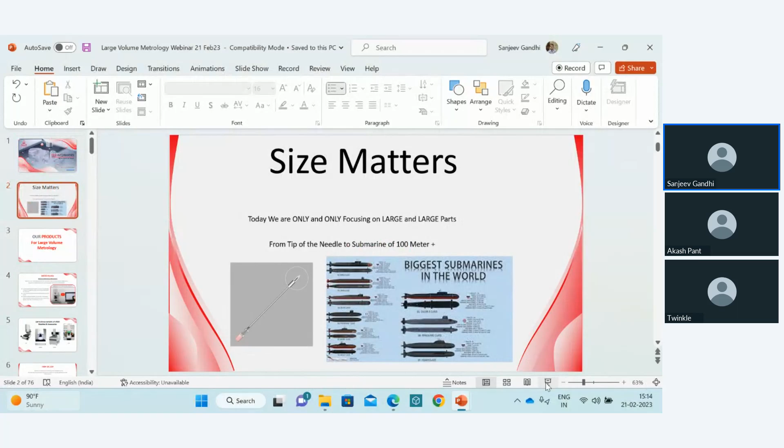With this little introduction, what Akash started: size matters. Well, size matters for you because you are manufacturing. Size does not matter for us, because if someone from the medical industry comes to us with a needle, for example Hindustan Syringes, we are able to measure that needle, even the tip of the needle. On the other hand, when we talk to Hindustan Shipyard or Goa Shipyard or L&T, who are making large submarines, we are working with them. So size matters, but for us, size does not matter.

End of the day, whether it's a needle or a submarine, it is a physical object having a drawing or a CAD, and we should be able to measure that using the drawing or CAD very precisely. That is what our job is.

As I said, webinars are basically for knowledge sharing, trying to understand each other. Today we took a topic which people generally avoid, because most organizations cannot measure very large parts. But since we are able to measure from the tip of a needle to a large 100-meter-plus part, our topic today is only on large volume metrology. For the people attending today, if some of you are from small parts, please don't mind, stay available, we can answer your questions as well. As I said, a part is a part, but my focus today is going to be on large parts only.

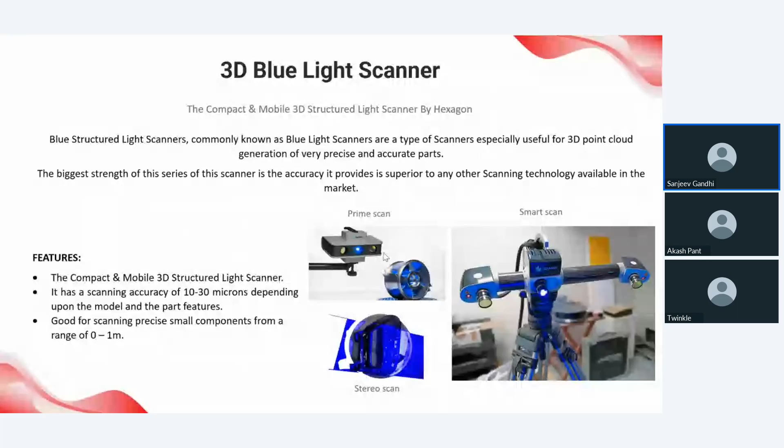All these technologies are from Hexagon, my partner. Hexagon is a multi-country equipment maker - this equipment is made in Germany, and on the other hand, some equipment is made in the US, etc. Another company, Wenzel or ZG now, we are talking about handheld scanning, which is very common.

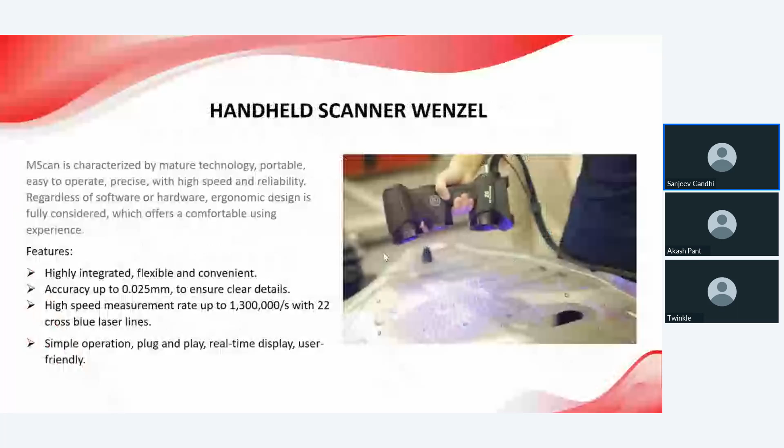Now jumping to another technology without touching the application yet - application I'll come back to. LMI is a company from Canada doing a lot of automation-related work, measuring parts with the help of laser sensors. It can be a point sensor, a line sensor, or a snapshot sensor. Just give me a couple of minutes, I'll talk about the application.

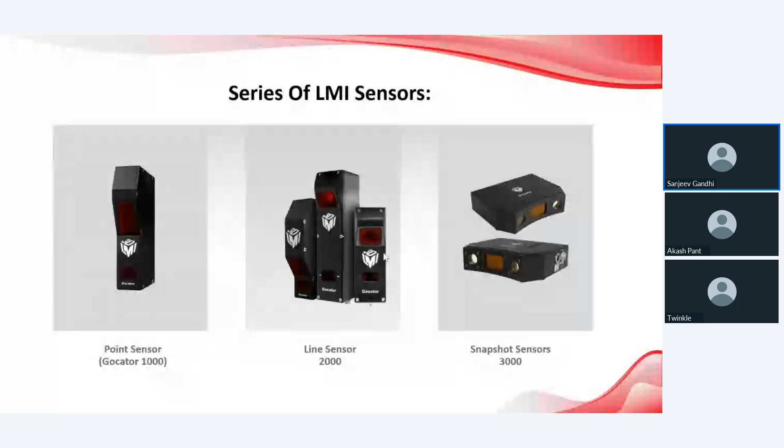Tracker, very, very important for large parts. As I said, today's theme is large parts. So laser tracker by Leica, or Hexagon now - Hexagon took over Leica. Since I worked directly with Leica for 17, 18 years, that's the reason I belong to your line precisely. So I'll be talking more about a lot of applications - of course Romer arm, or Hexagon arm, are some of the applications.

One very niche product we call gap and flush, from a very niche company from UK called Gap, the Third Dimension. It's very popular for measuring scratches on a large part, and very popular for measuring very small bend radius on a very large part. So this is a small tool, but can be used for very large parts.

You all remember, CMMs are generally meant for shop floor. But shop floor CMMs are also designed nowadays to measure large parts. When your shaft is 10 meters and still you want to maintain GD&T with the accuracy of 10 microns, is it possible? Very, very difficult. But some organizations like Itaka, an Italian company, have proven that even large parts on a shop floor can be measured with high precision. So these are some glimpses of that company.

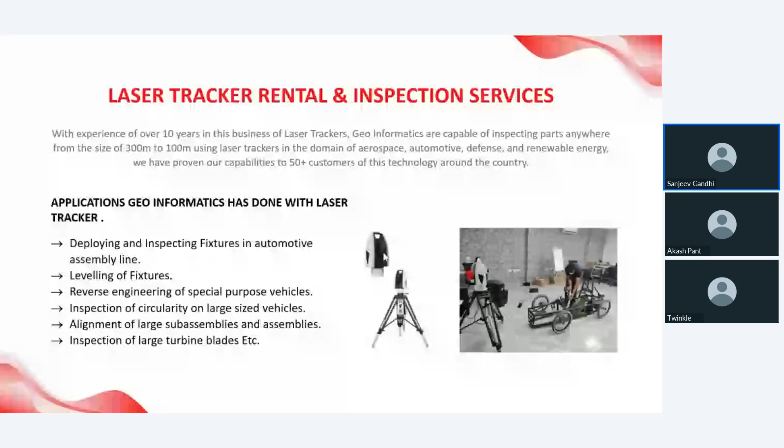Both are surely possible. Well, I will stop here about just talking about technology and technology.

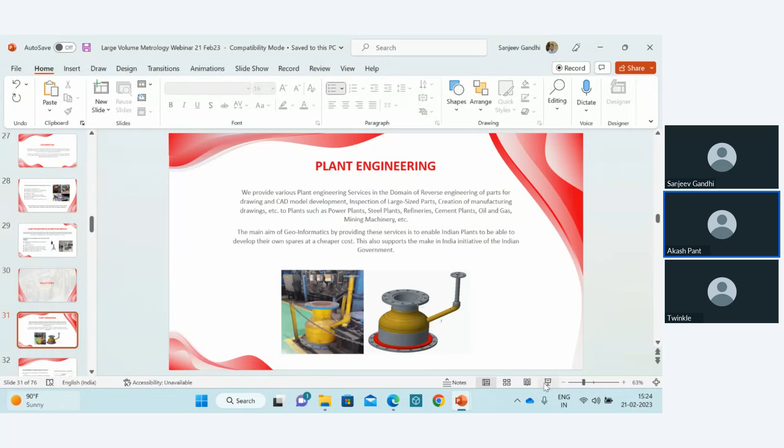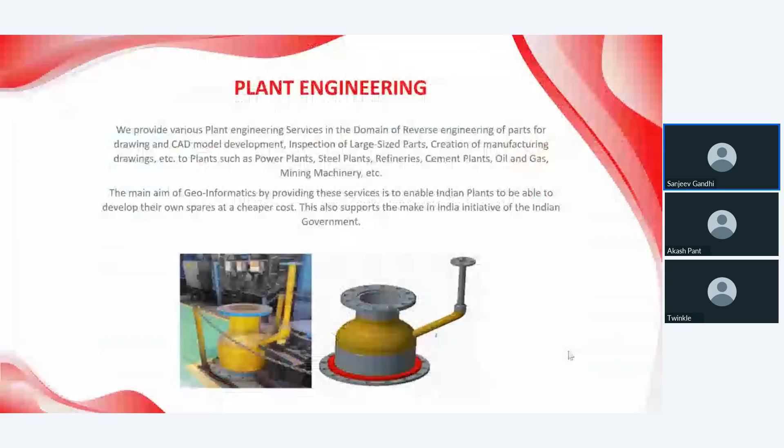When we say plant, now I'm talking about the application, not just the machines or hardware or software. When we say plant, what does it mean? It can be a cement plant, an oil refinery, NTPC's power plant, BHEL's turbine plant, any plant, a sugar plant. Let us take a sugar plant.

Such kind of plants have a lot of assets, and these assets were made in China, unfortunately, or Russia, or some other countries. And those countries never gave us technology to maintain that. So generally these plants do not have drawings, do not have CAD. Due to that, they are not able to maintain them after 20 or 30 years. So most plants have opened their own departments, which some organizations call an engineering department, maintenance department, automation department, etc. So what they do is try to make drawings of these parts.

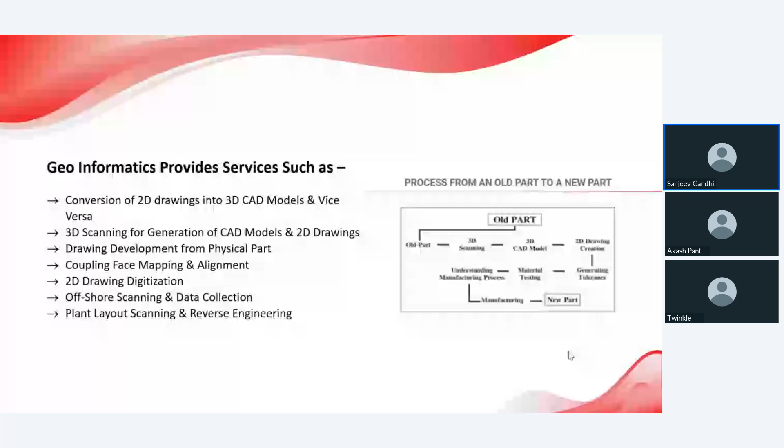So solutions in aerospace industry, what we can provide - again, as I said, size. If you see here, size doesn't matter to us. Be it a wing or a fuselage or an engine part, all are different sizes, bigger size, small size.

Our organization is capable of giving you solutions irrespective of the size.

So what we do for Make in India: we do drawings, 3D inspection, and reverse engineering. Reverse engineering is not a bad name at all. It simply means I need a drawing but I don't have one, so I create it from the part. In normal engineering, first there's a drawing and then you create a part. But today, you have a part and you are creating a drawing from the part.

Surface modeling, irrespective of class A or class B, inspection of large frames, etc., we are able to measure. As I said, my partner Hexagon—we work with them, they've been our partner for many years now. So we work with the laser tracker.

I'm going to spend some time on the laser tracker and show you some astonishing pictures. You may be wondering whether we had done such kind of work or not—we had done serious work in our country. I can't name everyone, but I can name some of them. You know very well, when you talk about defense, shipbuilding, or submarine building, you sign NDAs, but still certain things are allowed to be discussed.

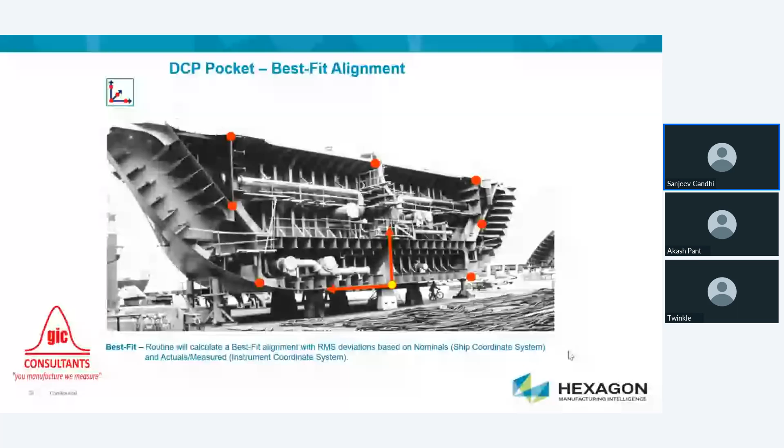So we have technology now for handling such large structures. You can imagine how big the size is. This is our strength—we are able to capture such large parts without touching, non-contact. Of course, I shouldn't say only non-contact; in many places we have to make contact as well.

These are the decks where a lot of strengthening elements are there. We need to go and measure that. This is what we do with the help of our technology.

When you talk about a shell, be it for a refinery or a submarine, that is not rolled in one go—it's rolled as a couple of segments, then you weld those segments together. After welding, does it still remain a perfect cylinder? Practically no. But how much is it out of cylindricity or out of circularity? You need to know, because you need to correct that before you start using it. This is our strength.

We are able to capture shells as big as 8, 10, or 12 meters, sitting horizontally or vertically. We capture that with the help of the laser tracker, thanks to Leica and thanks to Hexagon, and we're able to measure very, very precisely.

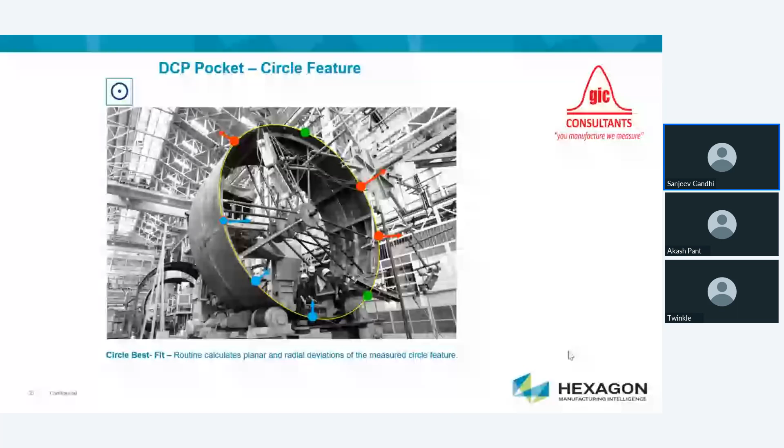All these things you are seeing are large parts—this is a hull for a large ship. And you see, the hull also has a profile; it's no longer just a geometrical part. We are able to capture all such kinds of things very easily.

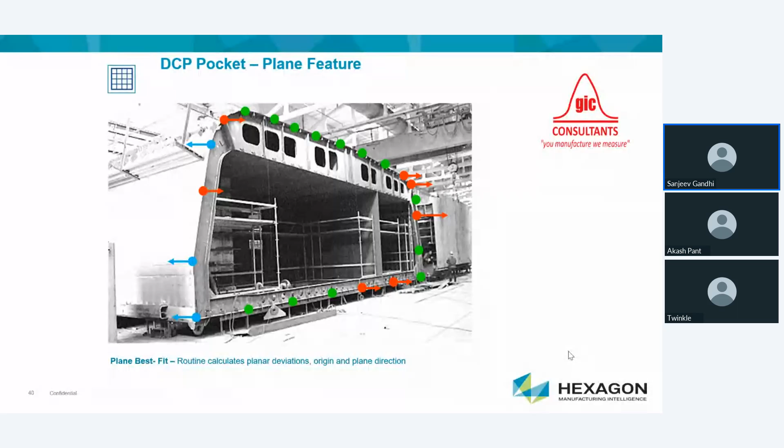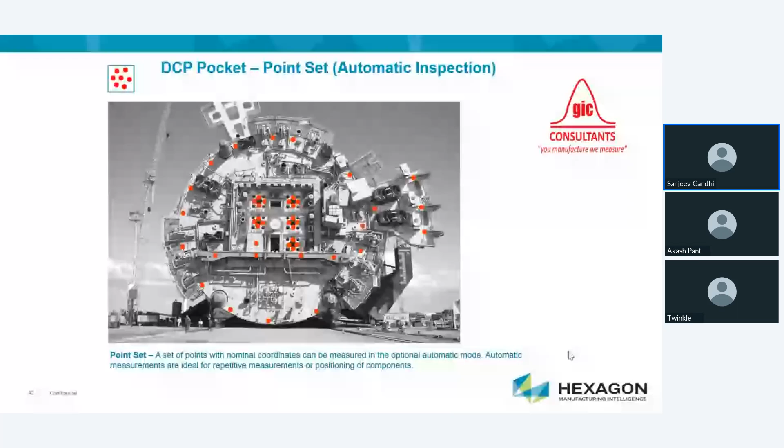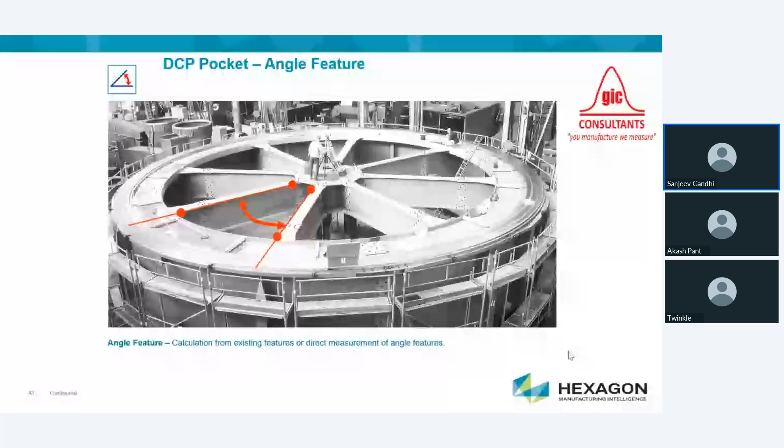Here, what we are doing is measuring as-built parts—trying to measure whether everything is as per the drawing or not. Since it's a circular or cylindrical part, that's why you stand more or less at the center of the project. As I said, here we are trying to measure many basic things, maybe direct 3D distances, but with accuracy.

Now I'm just jumping into rollers. Rollers are everywhere, in a steel plant or a paper plant. Rollers need to be aligned because when rollers roll, they become unaligned after some years, after some months.

We are able to align these rollers. If the rollers are not aligned properly, they will have a non-uniform profile. The thickness will not be uniform because between two rollers there's a workpiece, and you get a thickness of the sheet coming out of that. That sheet is going to be used in a ship or in shipbuilding. If this thickness is not within tolerance, you are going to get a lot of nightmares at the time of using it.

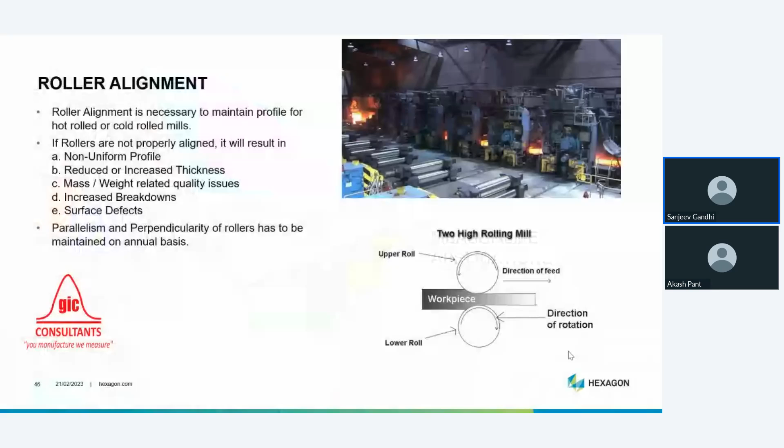Simple thing: master roller, slave roller. With the help of such kind of machines, we are able to capture that.

Billet, ingot inspection is another very normal thing. If you have a CAD, just scan it and compare with the CAD. If you have a drawing, probe it, or again measure using this normal thing.

Defect measurement is also very important. There was a time when we had to live with the defects, we'd scratch. Today, in a fighter aircraft, after some landings, they thoroughly check certain cracks, certain defects.

Generally, when we deboard the flight, you see a guy with a torch trying to look into the engine with the help of a torch. What does he do it for? He's just trying to see if there's any small defect or fault which may have occurred during the sortie or during the flight. Such a thing can be captured with the help of a gap gun very effectively.

Just carry a tool and you can carry that with you and try to measure with it.

We talk about shipbuilding, submarines, aircraft. How about things like a windmill, which is the talk of the day even today, renewable energy, be it solar or wind. Geo Informatics, I'm very proud to say, is working with more or less all turbine makers, be it LM, be it many others. I can name some, I cannot name others.

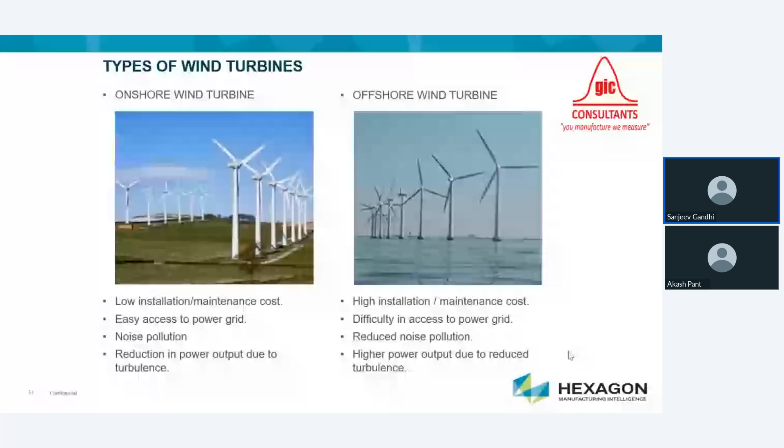So what are the applications? Applications are simple. You have a turbine blade, for example, or a mold of the blade. We are able to capture that. For that, we use a laser tracker, sometimes a CMM, or mostly we use such kind of equipment for large parts. For example, there's an organization in Gujarat making hubs, or engine hubs, for the blades.

Here, the circularity and PCD measurement we do with the help of another machine called portable CMM. On the other hand, such kind of blades require a tracker, which is 960. We are able to measure, in a single setting, around 120-meter size.

So, macro or micro measurement: blade measurement, mold measurement, blade pattern measurement, hub measurement, tower alignment. And on the micro side, where size is small, gearbox measurement, generator, anemometers, and small components of yaw assembly, we are able to capture.

As I said again and again, size matters, but for us, size does not matter. Maybe I'm trying to talk about size as product size and application.

As I said, a generator or a small component we are able to measure. Such large blades we have measured within our country multiple times, and thanks to our customers, we are able to give them the CAD profile wherever required, all the dimensions with respect to the root of the blade. When the blade is supposed to be scanned or measured, you need to have a CAD.

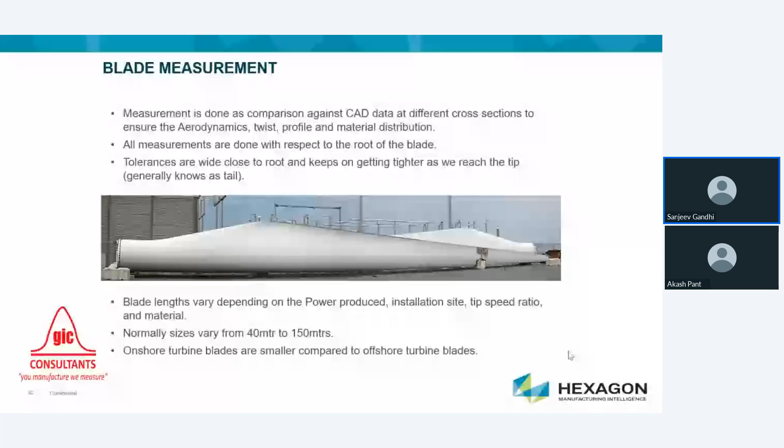For example, all of us who belong to the windmill industry know such blades produce a lot of white powder. So you need to be careful for the machine as well as for yourself when measuring it, because this white powder can go into your equipment, not only into your breath. Both things you need to be careful of.

So I'm saying technology is there to measure very fast, so that you need not be there for more time, so that your measurement can be done in lesser time, still with accuracy. This is one of the things called twist distribution and profile measurement.

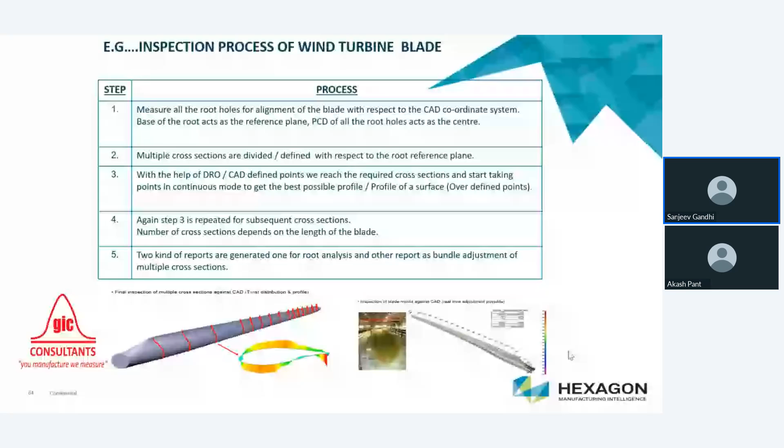So we are able to capture this with the help of laser tracker with a scanner and comparing with the CAD. This is a mold, and we are able to capture a lot of data out of that. This is a hub, and here the machine component. Here we have to measure flatness very properly, PCD very properly, the root very properly, because the root of the hub where the blade attaches is going to be butted together.

Conventional application, the tower alignment or the verticality checking is a very simple application, what we used to do earlier with the help of total station and all. Shaft measurement we do with the help of that, gear measurement, etc.

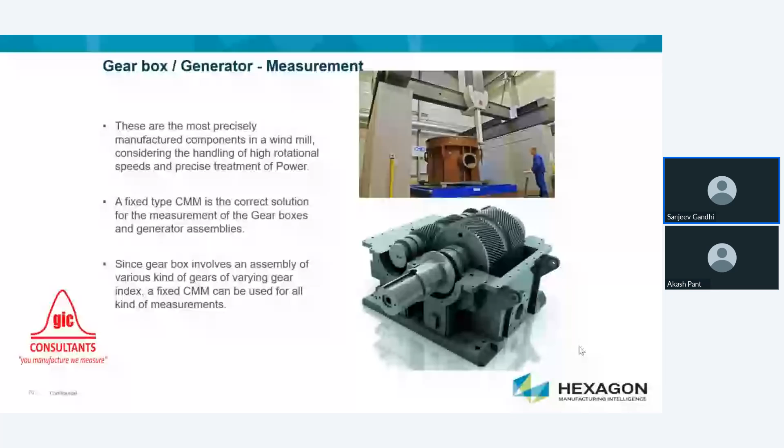Some of the names, some of you are participating today. CMMs, of course, CMMs also required for many times when you have a contact application. I was talking about VMM. This was a VMM from Microview, which I was telling you. We use both VMM for a very precise part. We use portable, and we use fixed CMM. So our organization fortunately has access to all the technologies under one roof, and we do not try to do everything with the help of the same machine.

Laser tracker can surely measure a half a meter part, but is it designed to do that? Answer is no. On the other hand, CMM can measure in bits and pieces a 10-meter part, but is it designed to do that? Answer is no. So our organization does not force technology. We are based on the application.

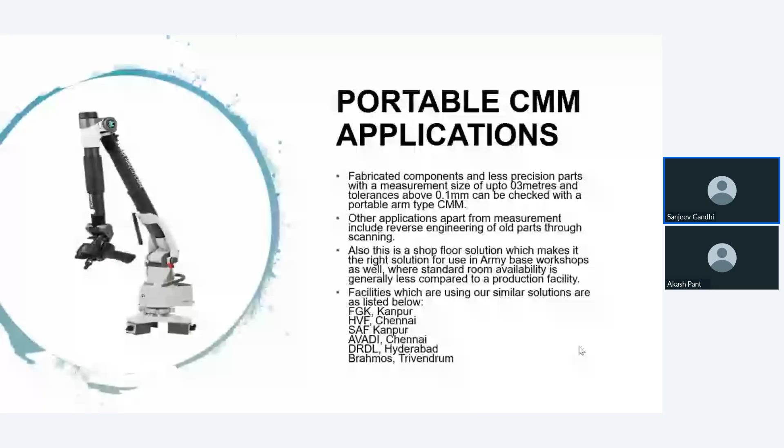See all these things, the circularity - the what they call, not circularity, but the smoothness of the outer exterior surface - we are able to capture because these trains need to run at a higher speed. Large blade parts we are able to capture. I'm just showing you the application, which I have shown you earlier also, just to give you the feel.

Steam turbines, for us, a very, very important thing. Geoinformatics serves around 12 NTPC plants, or rather 8 or 9 NTPC plants, for such kind of things. Wind energy gearboxes, large hydro turbines, large shells, gas turbines.

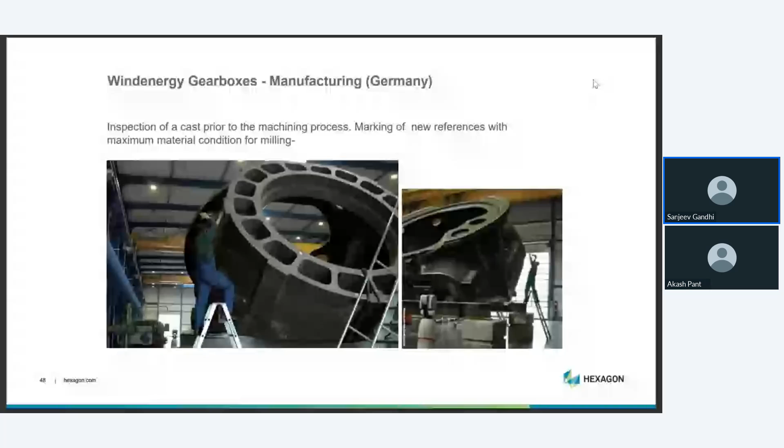You see the laser tracker sitting next to this. Laser tracker sitting on a very large tripod. Handheld scanner - this is a handheld scanner trying to scan the things. Another handheld scanner. Technology has gone very, very advanced now.

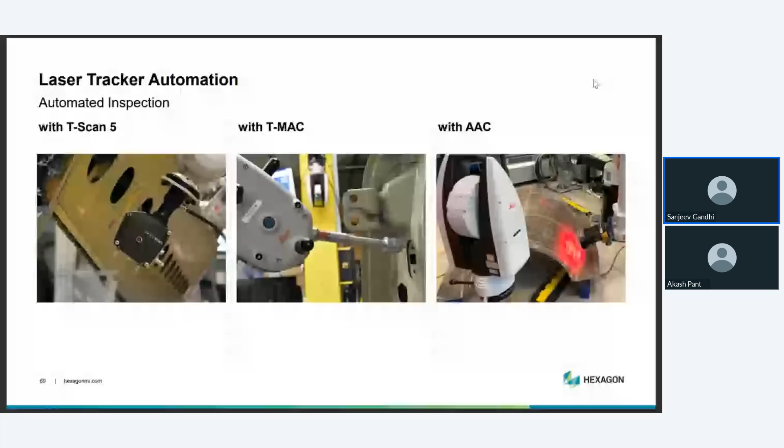Thanks to that, we are able to do a lot of work with good accuracy at the shop floor. This automated solution means trying to reduce the manpower so that instead of having 5 people sitting on the shop floor doing the measurement, can one person do it? Can robo do it? Of course, yes. This is what our strength is in today's time.

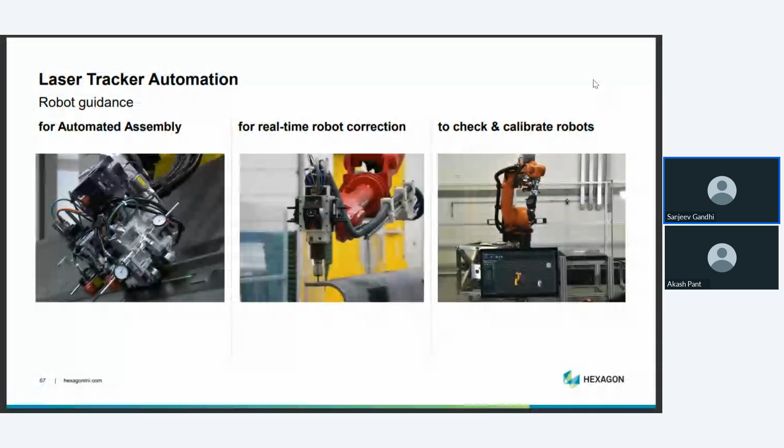And if we say integrated solution, it simply means combining the technology, combining robo with LMI sensors, combining robo with the Hexagon scanner. Such kind of things are very, very popular nowadays - popular means it is happening. This is all from my side, talking to all of you about applications, talking to you about equipment and our capabilities.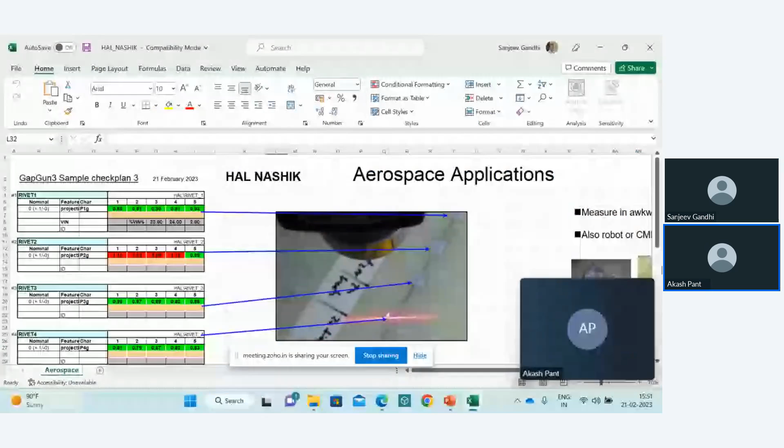I'm sharing my screen, just to answer your question because I do have that. Is this visible? Yes sir, it is visible to us.

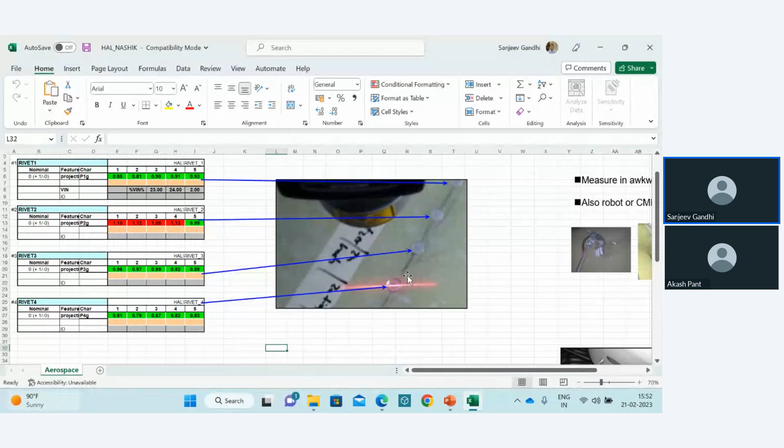Okay, this is from our HAL Nashik, and this is a rivet, and this rivet is flushed together on a wing. With the help of gap and flush - this equipment I was showing you - we just shoot a laser on the rivet and immediately get how much is the flushness. Flushness means the distance between the wing and the rivet which is protruding out, and we are able to capture that.

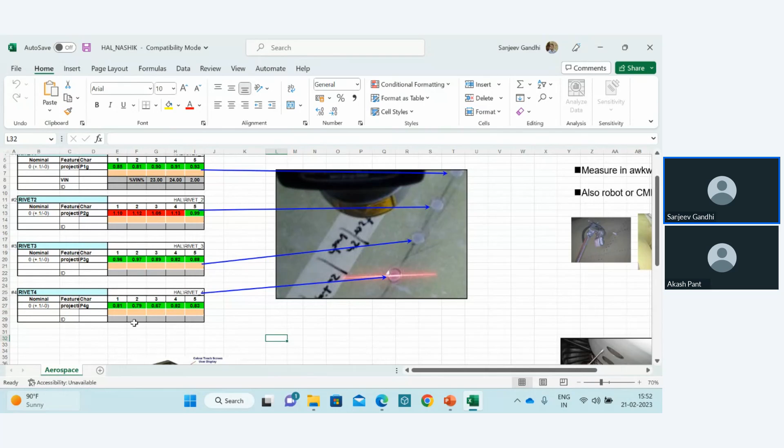So this is a very important application in aerospace for rivet height calculations. For example, here you see some rivets and some scratches - we are able to capture the scratch as well using gap and flush. It's an old slide, an old report I'm showing you. It's called GapGun Pro 2 now, no more GapGun 3. So this equipment can measure the scratch as well.

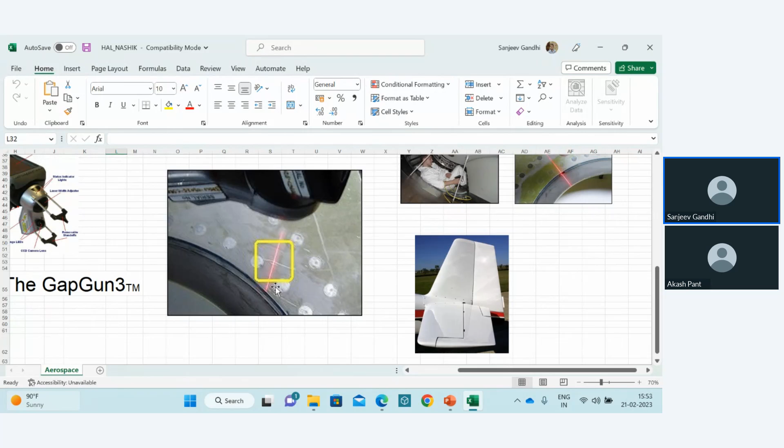So answer to your question, sir, is very much yes - we are able to calculate rivet height, we are able to calculate the defects, and defect has a definition. What is the defect definition? Defect means how much is the width and how much is the depth.

For example, on a fighter aircraft, scratches are always there. A bird hit makes a small scratch, but that scratch may not be harmful at this stage, but may become harmful if you are not attending to it. So immediately someone can capture the width and depth of the defect and then take the next action. Answer to your question, sir, is yes, we have that technology as well.

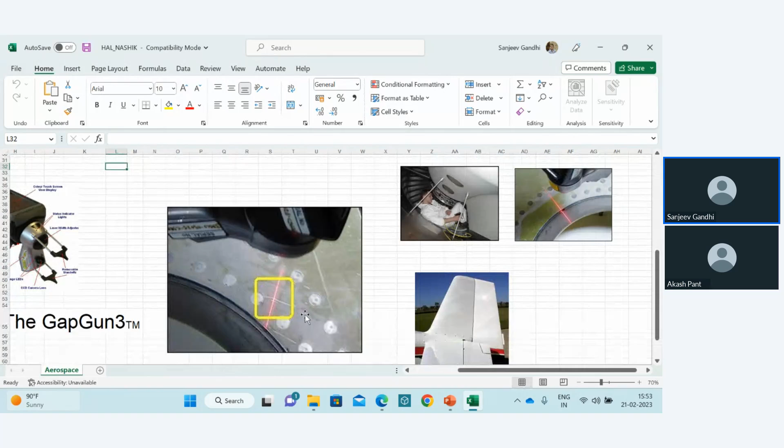Sir, Mr. Mukesh is asking, this is for CSK rivet head. Can it be used for bucked side dimension?

Honestly, I do not know this. Maybe we can have a one-to-one discussion, a little bit seeing how it looks. So, Mukesh, we need to have a small discussion whenever time permits. I think we can schedule a one-on-one session to understand your problem and give you the right solution. That's how we can proceed.

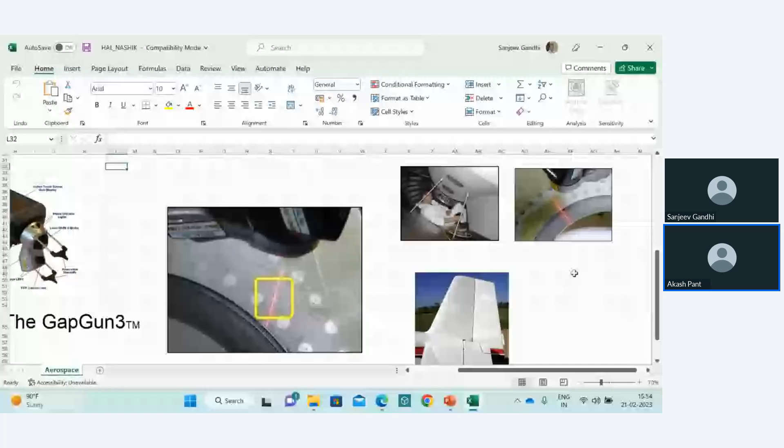Meanwhile, sir, we have another question from Mr. Manish. He is asking, can you show some CAD drawing output for reference, showing dimensions and tolerance of measured part? Yeah, which drawing we have created, right? Okay, just give me a second.

I'm just trying to bring out one drawing for you. I'm sharing my screen again.

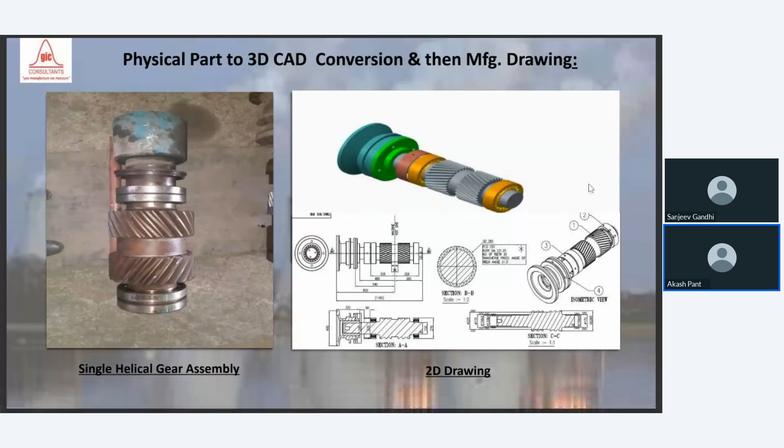Meanwhile, I had shared my email ID and phone number, so you can directly contact us and book a session, one-on-one demo, whatever you like with us. If you have any particular problem that we can solve for you, we can definitely have a look into that. Yes, sir, you can continue.

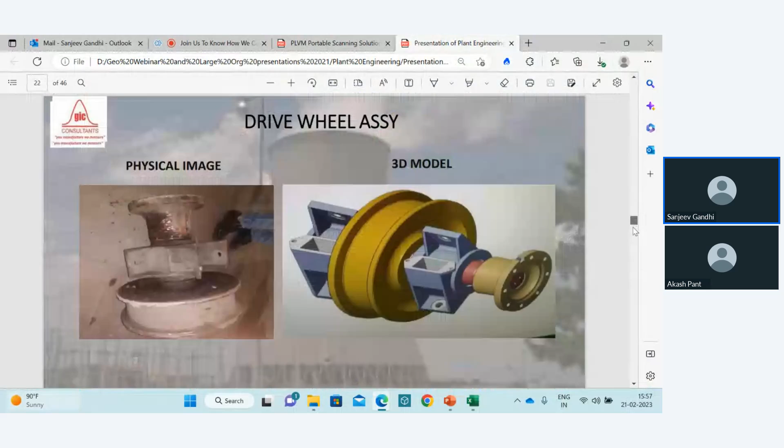If you see here, these are some of the parts. This is, for example, one of the parts. Just to show you, I'll keep going. We have done a lot of real work. I hope you will be able to see here. For example, some of the drawings I want to show you, how it looks from our side.

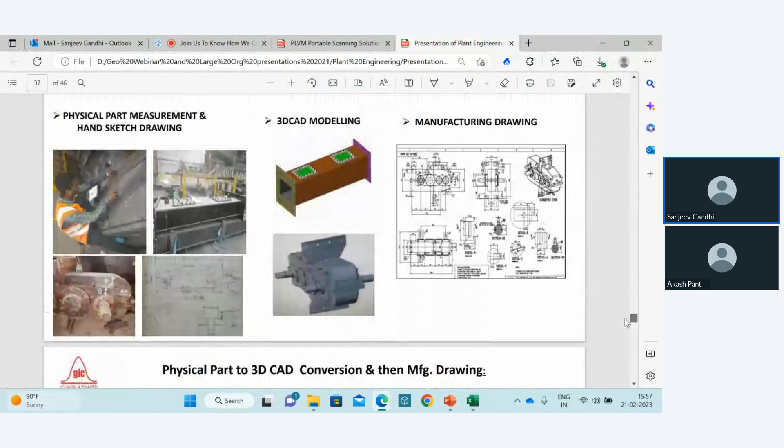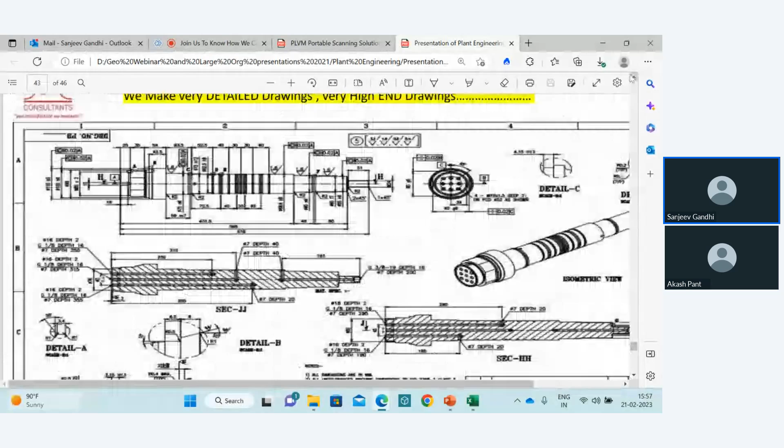Let me zoom this. For example, this is a shaft and this is the manufacturing drawing. We also provide material information if the customer gives us, otherwise we have to do material testing. So this is one of the drawings I'm showing you, which I can easily show. As you know, drawings also have certain restrictions to show, but this is one I'm showing you guys, which we made after scanning and modeling.

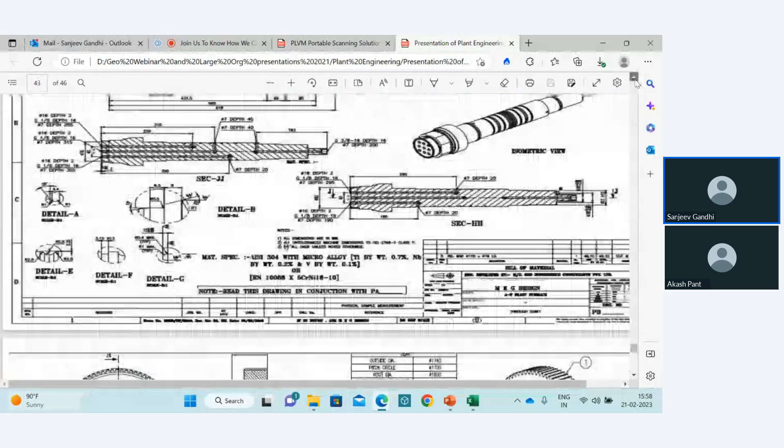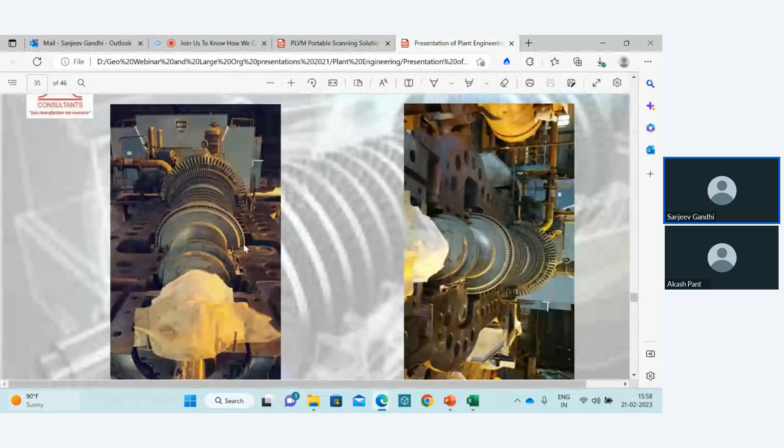This is all the drawing which we have created. We can give you PDF files of the drawings and the part. These are basic drawings, this is a child part drawing, but we also create very complicated drawings for what we call assembly. For example, you see here the complete, like say, turbine disc.

We are able to create a complete assembly drawing, including the child drawing. For example, this is a part of an engine. We have done the scanning, modeling, and drawing creation, so drawing as well as the 3D CAD model. We are working in NX, Design X, NX, and many times Creo as well. So we are able to give you all these parametric associated drawings with all manufacturing information.

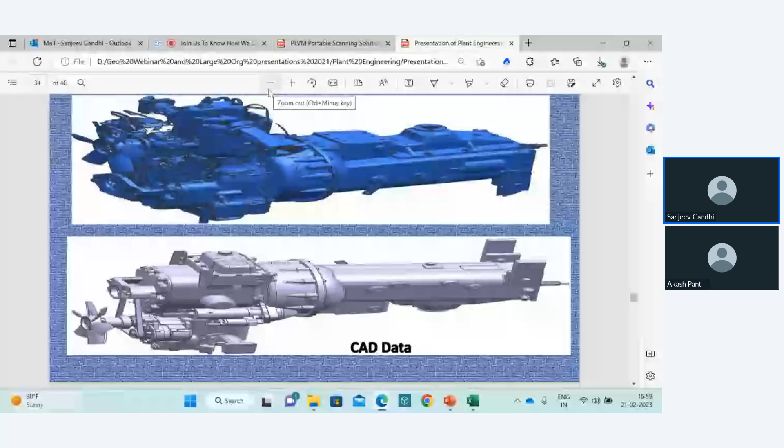I hope I answered that question for you, sir. I hope, Mr. Manish, we were able to answer your question. So, sir, that's it. I think we had almost covered all the questions, and it's almost 4 o'clock.